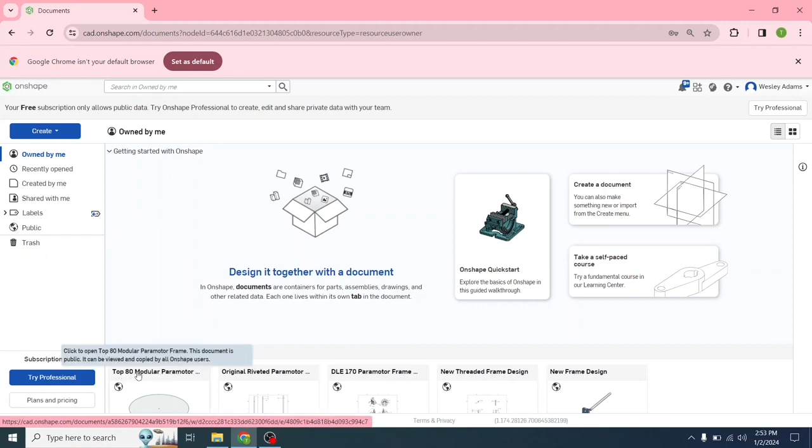Last time we created this file here, top 80 modular paramotor frame. Let's left click on that and open it up. We're going to go through and create some parts.

You'll get a lot of repetition with the same tools. That'll be good because if you're new to Onshape or new to 3D CAD, it'll give you a lot of practice with using the tools and how they function. If I go too fast, just pause the video and then you can get caught up and then restart the video. So I'm going to go over to the navigation cube, far upper right hand corner.

Left click on top view. Come over, left click on sketch. Left click on the top plane right here. You notice it highlighted just under sketch 1. It's listed here, so we've got it selected.

We're going to left click on the center point circle tool. We're going to go to the center of that top plane. Left click, drag that out, and then left click again. Now, if I try to left click without turning this off, there's a couple different ways to turn this tool off. I could just left click on it, or I can hit escape. Because if I select any point inside that plane, it's going to create another circle if I don't deactivate the center point circle.

Now that we've got that created, we're going to go up to the dimension tool, left click on that, left click on the outer part of that circle, drag it away, and we're going to set this at 0.73.

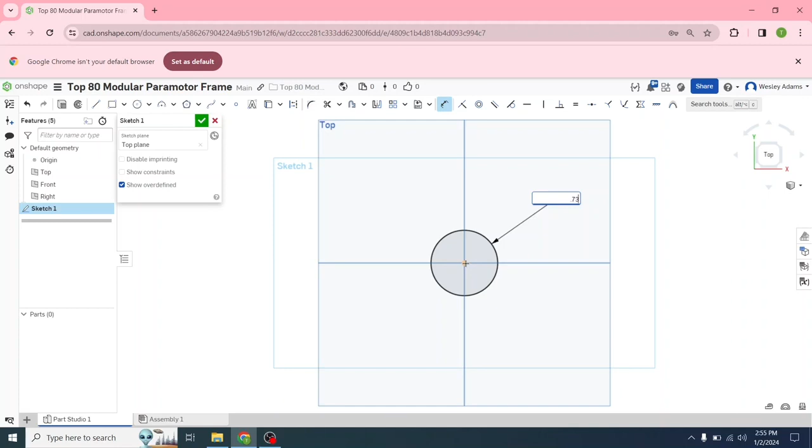Now this is going to be a 3/4 inch tube that we're going to use, but I'm setting it a little bit smaller because what's going to happen is we're going to 3D print this. And that's another reason we're not creating this as a tube. Like I'm not creating a second circle within that circle and making it look like a tube. It'll be too fragile for assembly. So we're just going to make the outer diameter, not the inner diameter, not the wall thickness for this tube. I'm not concerned about shrinkage on this tube, but when we make these modular connections, they're going to shrink and it'd be hard to fit this tube in if we keep the actual diameter of the real part.

So I'm going to hit enter. You notice that is now 0.73. In real world, it would be 0.75. So now we've got to close this sketch out before we do anything else.

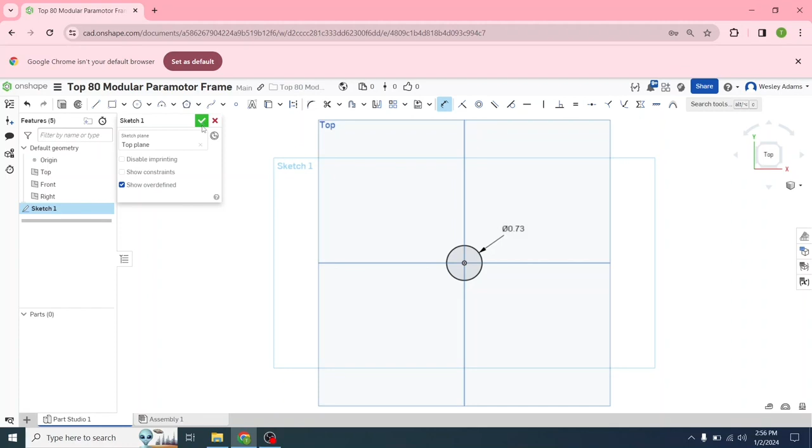So I'm going to left click on that plus sign. I'm going to go over to the navigation cube. I'm going to left click on the front plane. I'm going to go over and create a new sketch. Left click, come over to front plane, left click on that. Go over, select the line tool, left click, go to the center of the front plane, left click on the center of the front plane, drag that up a little bit, left click again.

Now notice how it's trying to create another line. If I left click, it's going to form that line. I don't want that to happen, so I'm going to hit escape, and not only did the line go away, but it deactivated that line tool up.

I'm going to go over to the dimension tool again. I'm going to left click on the line, drag that out, and we're going to go 36 inches. So I'm going to left click on the numbers, 36 inches. If yours is set to a different dimension, like millimeters, centimeters, some other measurement, I'm going to show you how to change that.

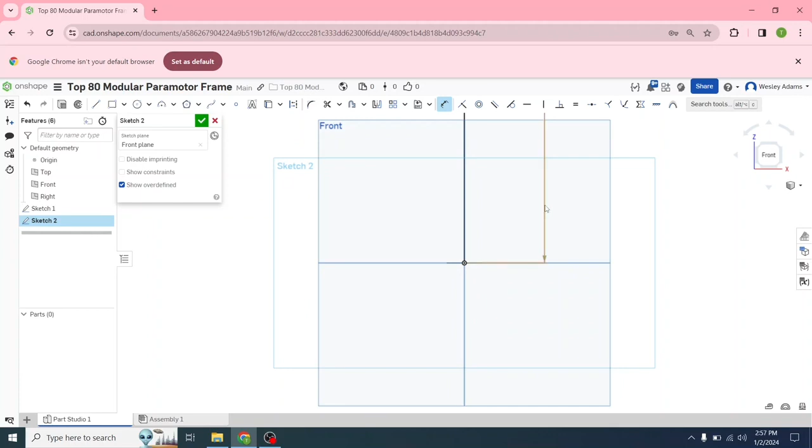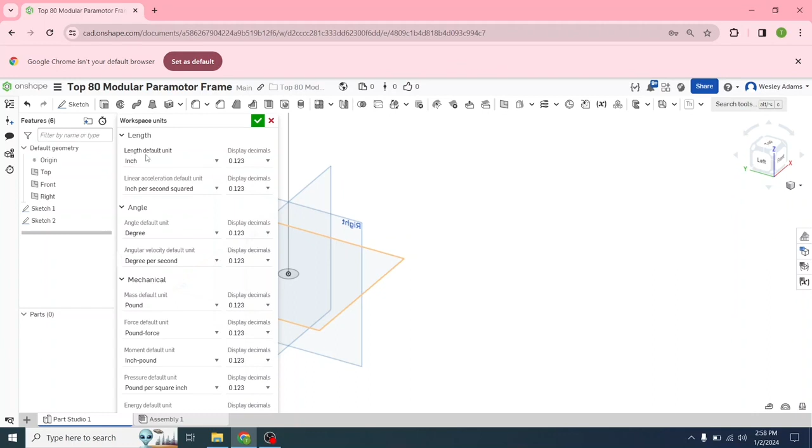I'm going to left click on sketch 2. Now go up to these 3 lines right next to Onshape, and then go to workspace, units. Left click on that and set to inches. That's what we're going to do for our default length. That's what our real world assembly is going to be.

We're going to use one of our tools to form the tube, the outer portion of the tube. Go over to the sweep tool. So it's the third one in the list. Left click on that. Notice it's set at solid new. I'm going to go down and I'm going to left click on that circle.

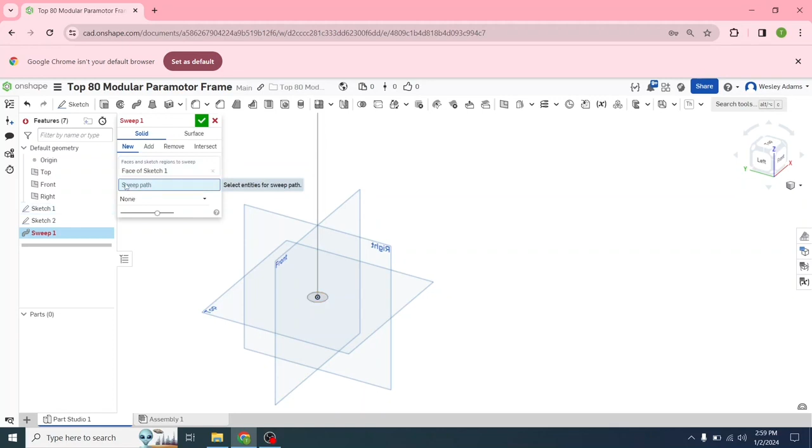Now it's asking, what's the path? So what do we want to sweep? What's it going to follow? Left click on that red line. Left click on this line we created, and now it has formed our tube. Make sure it's solid, new, faces of sketch 1 and edge of sketch 2 for the path.

I'm going to left click on this green check mark and I'm going to scroll out. I'm going to go back to front view real quick.

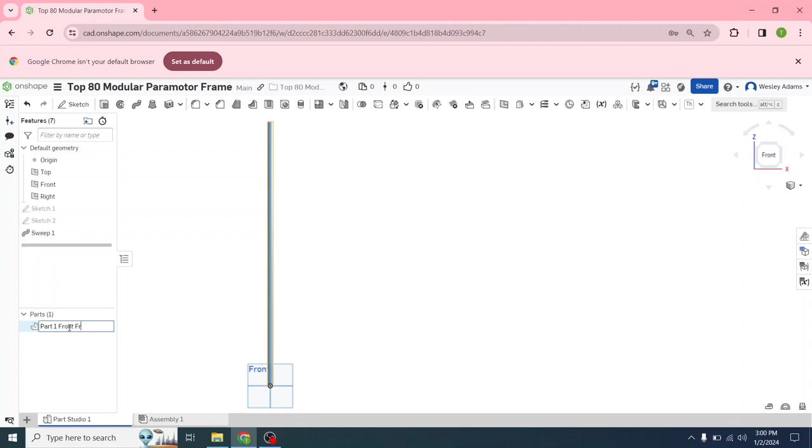I'm going to go down here to part 1 and right click on that and we're going to rename it. So this is going to be our front frame tube. I'm going to hit enter. We're not done with it yet.

Down on the wheel and hold, you can move that part around. We're in right view. I'm going to left click on sketch, left click right view. I'm going to scroll in. You notice we've got right plane selected.

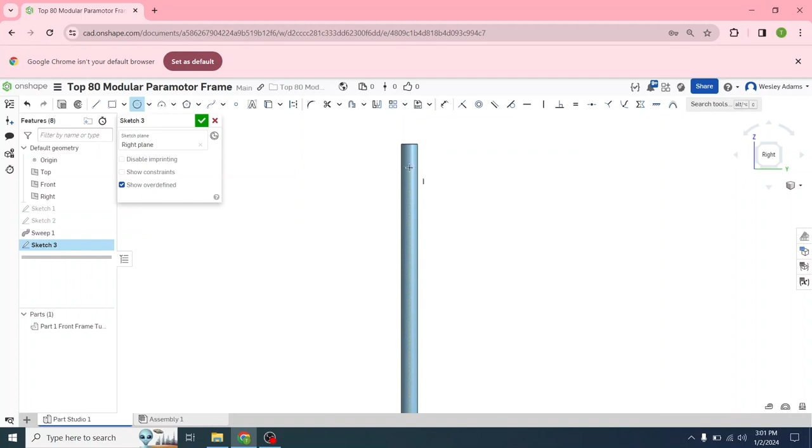I'm going to create a center point circle here. I'm going to left click here. Now you see that dashed line. I'm going to scroll in so you can see it. It's yellow, that yellow dashed line, and then that vertical line that appears in that square. That's telling us that we're centered up in that tube, so we're in the center portion relative to the right plane. And I'm going to left click on that.

So we're going to create a 10 millimeter size hole here. So we need that in inches. So 0.394 is what we're looking for.

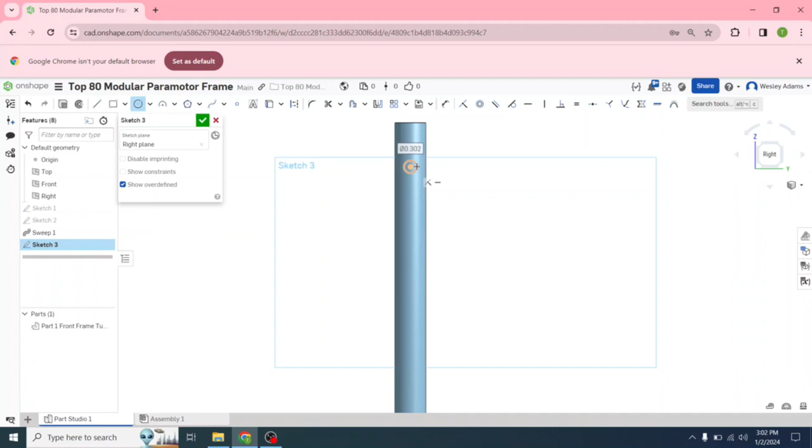We're going to go to the dimension tool and we want that circle we just created, because this is going to be the hole for the swing arms. We want it 3 inches from the top because we're going to have a connection here at the top, and we need it to be in between those two connections.

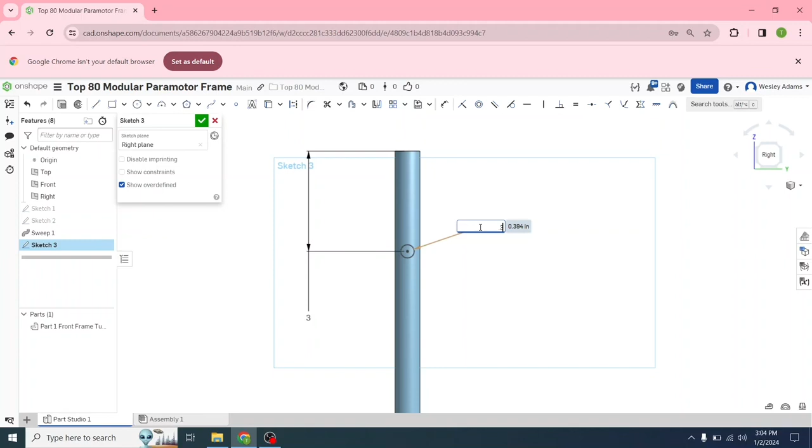So I'm going to left click on that distance I currently have. I'm going to do 3 inches. Double click on that and that should be set at 0.394. Hit enter. And it changes the size of that because we're going to use an M10 bolt, so a 10 millimeter bolt is going to go in that to hold the swing arm on.

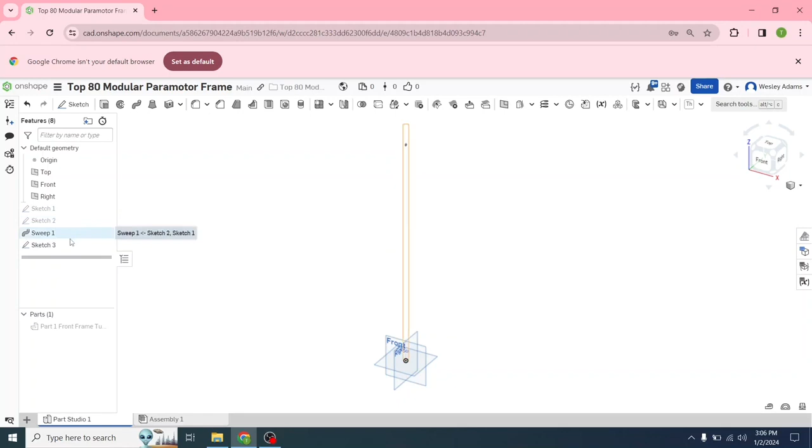So now let's close that out by left clicking the check mark. Now you can, if you need to label these, say what these sketches go to - so you could do sketch 1 front frame tube, sketch 2 front frame tube. The problem is it'll change - the next sketch will be a sketch 1 if you change this. I personally just like to keep these in order because you can come back down and highlight the part, and any sketches near it will be relative to the part you create.

We're going to use another tool. So let's go over, we're in isometric view. We need to extrude that out because we're going to create a hole for that. And left click on the extrude tool. Now it's asking us, what are we going to extrude? We just created that hole or that circle. Left click on sketch 3 and we want it to remove.

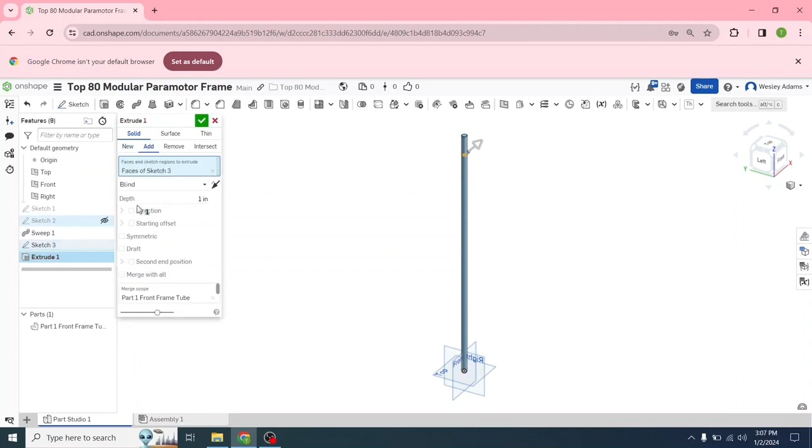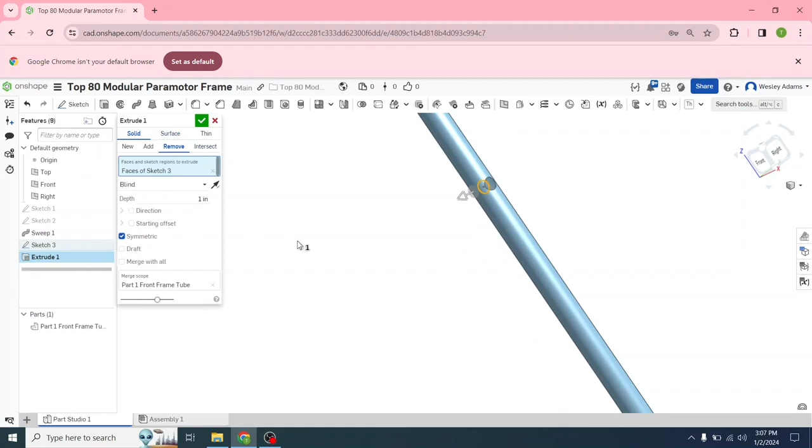So let me scroll in on this so you can kind of see what's going on. Notice it created a hole here, but it didn't do that on the other side because it's not symmetric. We're going to go symmetric. It's set at 1 inch, so we know it's going to go out far enough now on each side to create that hole, and it's removed that area. Now let's left click on that, and now we have that hole centered up.

So now part 1 is created. We're going to go back in and create some additional parts. That's all we needed for part 1. Everything we just did for part 1, we're going to do for part 2, so it'll give you repetition. Click on top view. We're going to create the motor mounts now.

So let's go left click on sketch, left click on top view, left click center point circle, left click in the center of top view, drag that out, left click again and then hit escape to deactivate the center point circle tool. Left click on the dimension tool, left click, drag that out, 0.73 because we're going slightly smaller than the actual part, so when we 3D print it, we won't have any problem sliding these past each other.

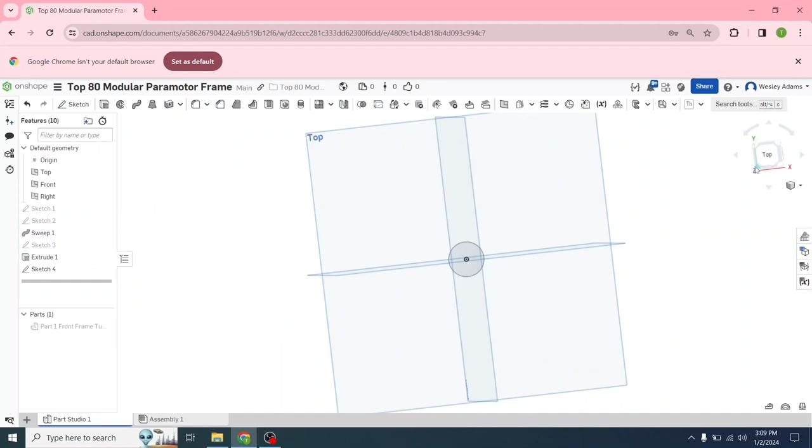So that's on top view. Let's close sketch 4 out. Let's go over, left click on front view, left click on sketch, left click on front view. You notice it says front plane here.

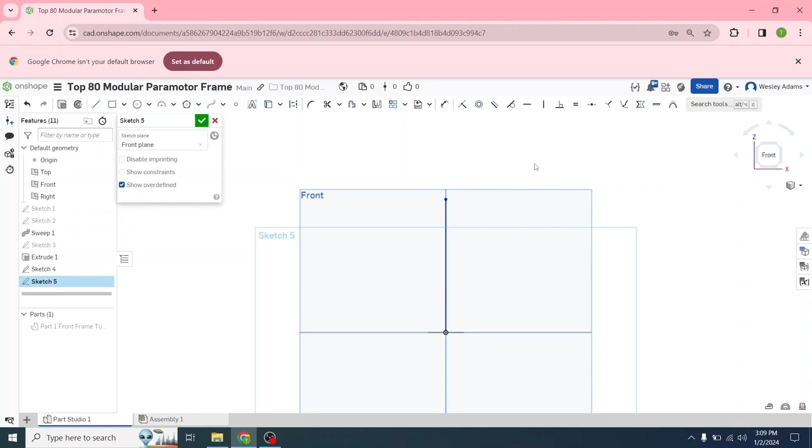Left click on the line tool, go to the center of the front plane, left click on that highlighted region, pull that away, left click again, pull the line away, hit escape so we don't create a second line. Left click on the dimension tool, left click on that line again, 14 inches. So hit enter, now we're at 14 inches. Left click on sketch 5 on that check mark.

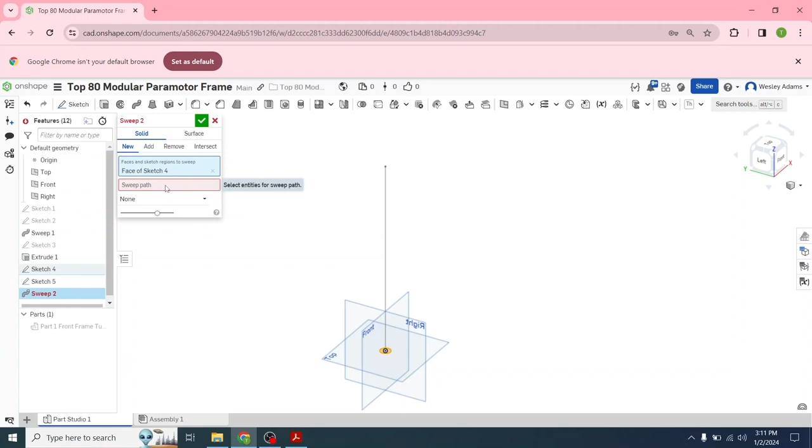Now we're going to create this as a tube just like we did. So I went over to isometric view, clicked on the corner, left click. Let's go over to the sweep tool again, left click on that. It opens up solid new because we're creating a new part. Left click on the circle so that it highlights. Go up here where it says sweep path, left click until it turns blue. Left click on the line and it created our tube for us.

Make sure these are still solid and new. Face of sketch 4 should be in this region. Edge of sketch 5 should be here. Left click on the check mark.

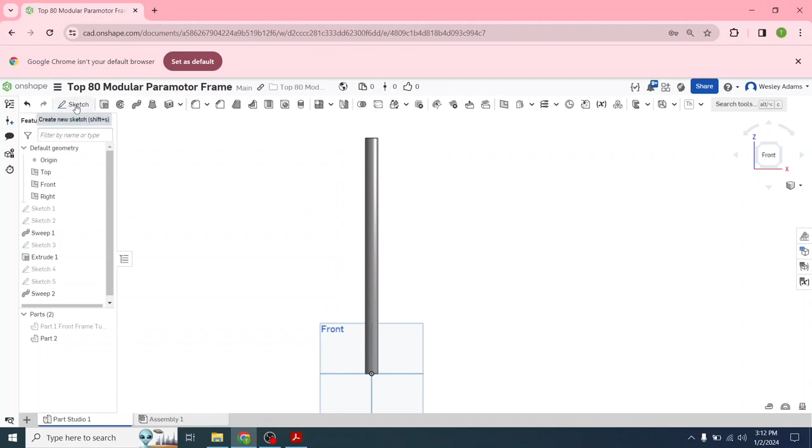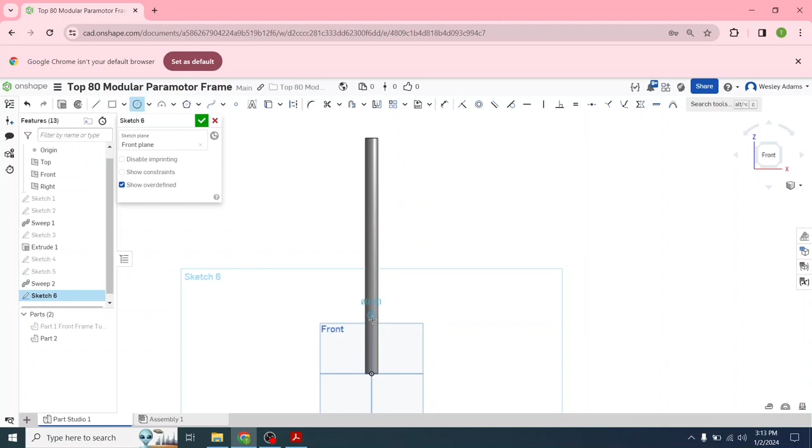Alright, so we are in front view. Let's go to sketch, select, left click on front view. You see it selected here under sketch 6. We're going to create 2 center point circles. We're going to create one. Notice that dashed line telling us we're in the center. We're also getting that vertical line. We're going to drag that out, and we'll get these set.

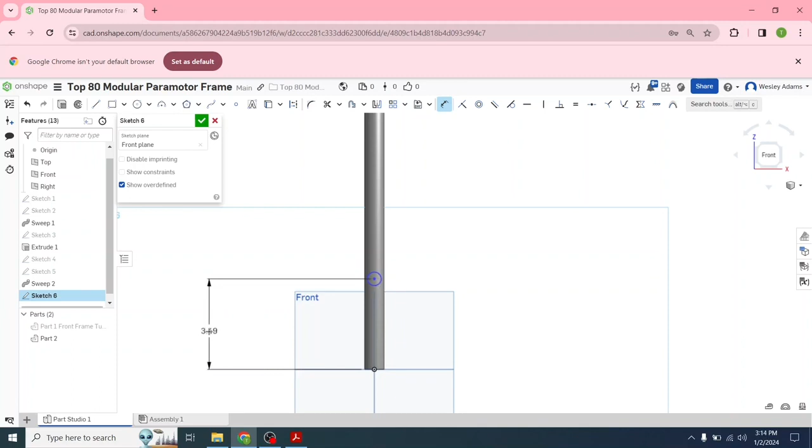Alright, so let's go up, left click on dimension tool, go to the center of that circle. Let me scroll in so you can see. So not the outer part, the center. Left click on that, left click on the edge, bring that away, and that should be 2.75. So we're going to go 2.75 inches from that edge.

We're going to do the same thing for this one. Select the center, select the edge with the dimension tool, pull that away, 2.75, 2.75. There we go, it should be 8.5 inches apart. This is not necessary, but I'm going to do it anyway, just to drag that out. That should be 8.5 inches apart.

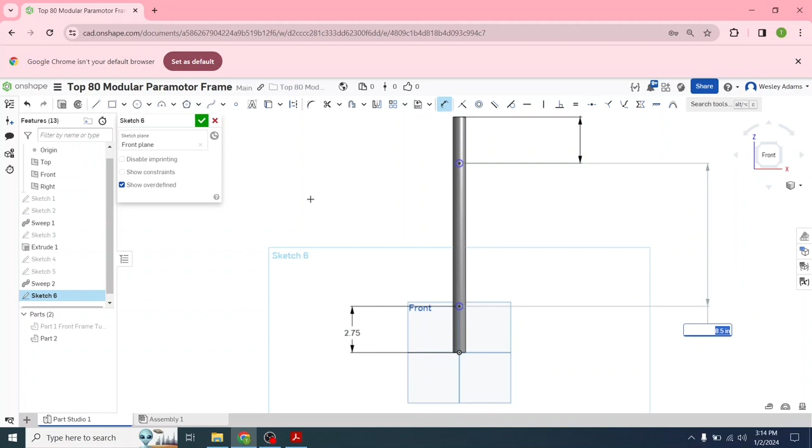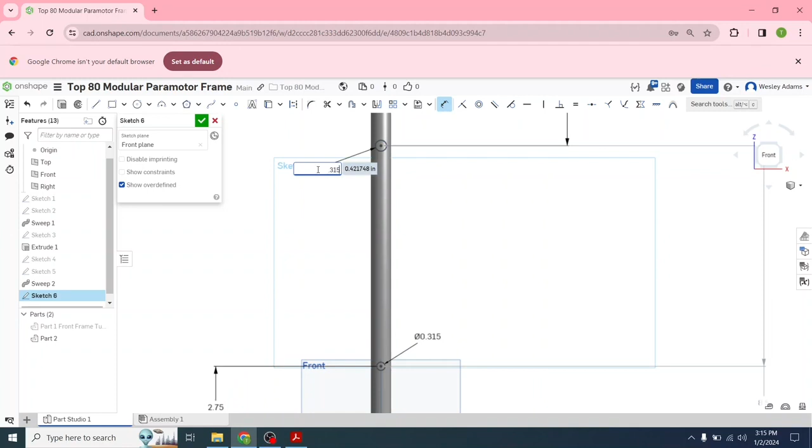And then hit enter. Oh, actually, we've got one more thing to do. So we're still on the dimension tool. This needs to be, so I'm going to left click on that, 0.315, so 8 millimeters. We're doing it in inches since everything is set to inches. That's the size of bolt we're going to use. 0.315. Hit enter. There we go. So now those are the proper diameter.

Now let's close this out. Let's extrude those. So left click on extrude. Go back to the circles we just created, which was sketch 6. I'm going to left click on that. So now those have been selected. Now you notice a cylinder popped out of that.

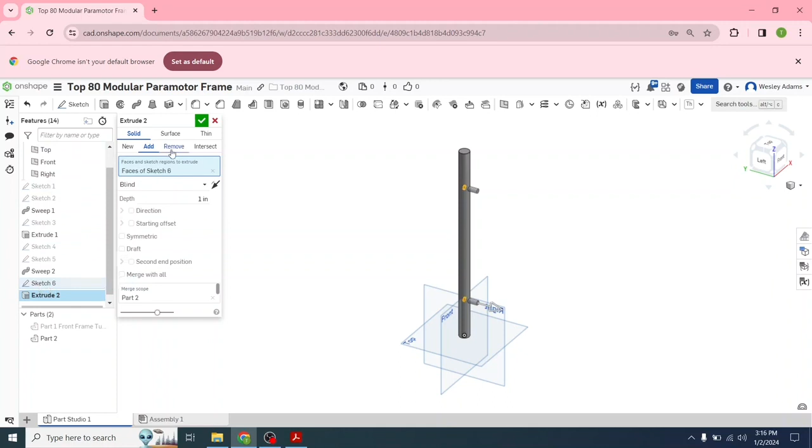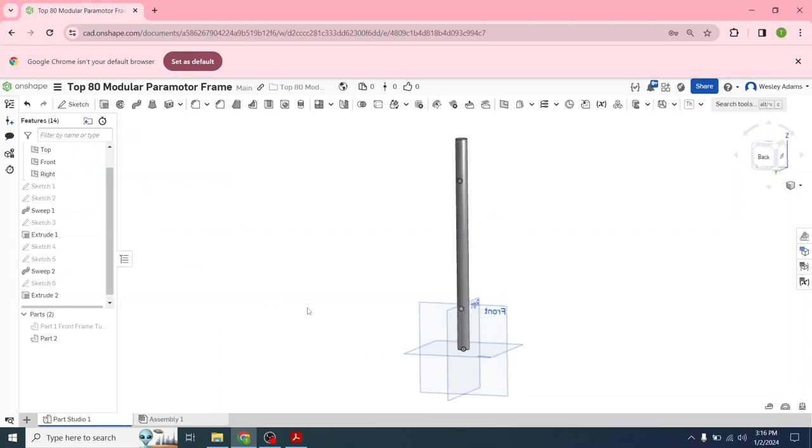We don't want a cylinder. We want to create a hole. So it's adding, we want to remove. So it should be solid, remove, symmetric, and since that depth is set to 1 inch for part 2, it should be coming out both sides. So it should have created a hole on either side. Left click on the check mark and we have extruded that. So now part 2 has been created.

Let's go down here and rename it so we know what it is. Right click, and I would always rename your parts, even if you don't rename the sketches, just to keep everything organized. Motor mounts.

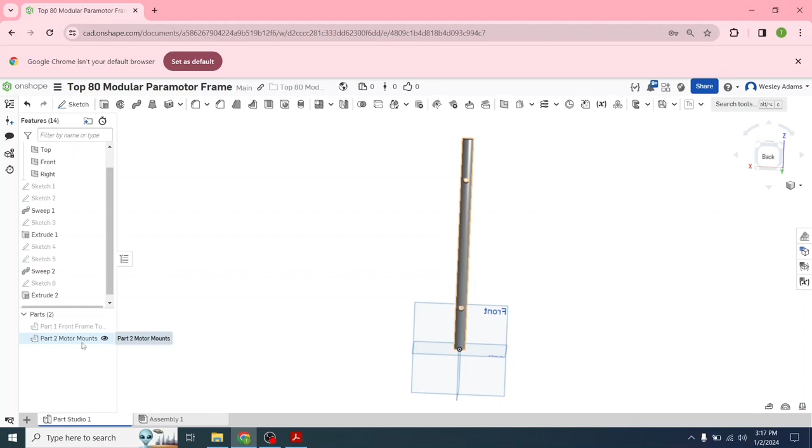All right, let's add something we didn't do for the last one, just so when we get to assembly view, everything is a different color. Let's right click on this, so all I did was right click on part 2. Let's go edit appearance. Let's make that a shade of green. And then left click.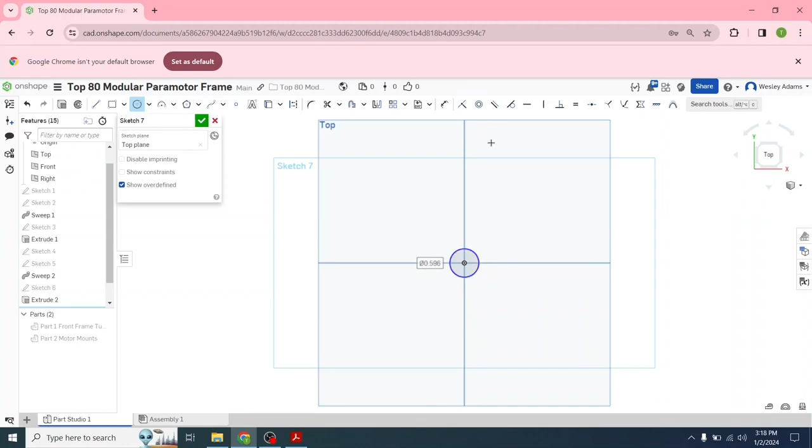Let's close that out, so we've gotten some repetition. This next one should be fairly easy for you. We're going to create the support tubes to top view again. Let's go to sketch, left click on top view, left click center point circle, left click on the center, drag that out. Hit escape to deactivate the center point circle.

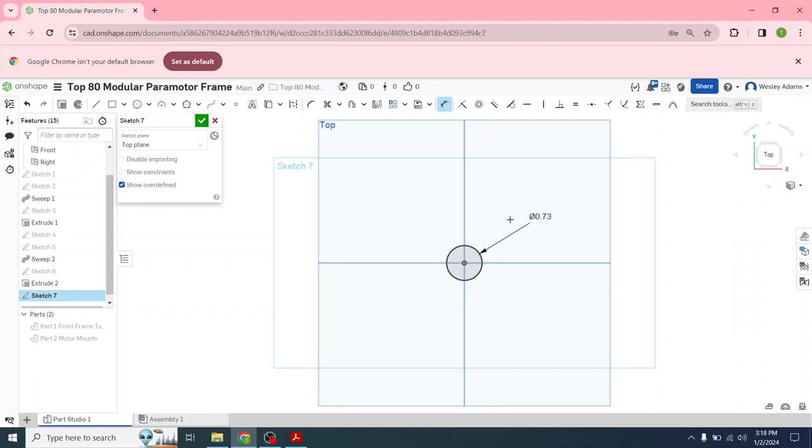Left click on the dimension tool. This one is going to be 0.73. Remember, we're going a little bit smaller scale than the actual real world part, mainly for the 3D prints so that everything fits together. All right, so we've created the circle.

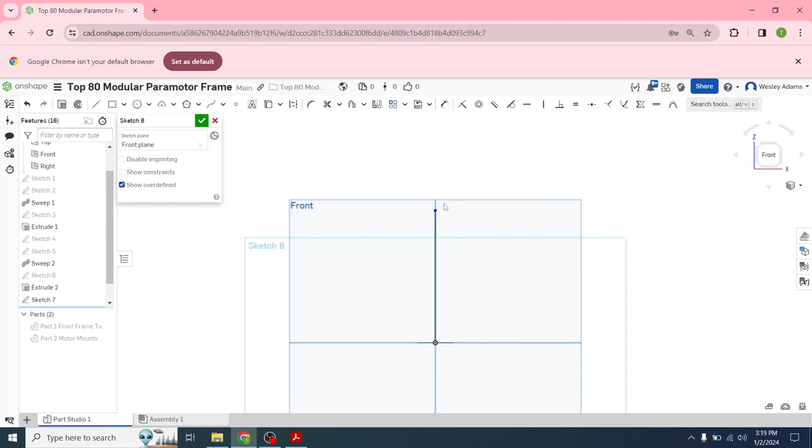Left click on sketch 7. Scroll around to front view using the navigation cube. I'm going to pull that down by holding the wheel down. Left click on sketch, left click on front view, left click on the line tool, go to the center of the front plane. When it highlights, left click, drag that up, left click again, pull that away, hit escape to deactivate that line tool. Left click on the dimension tool, and this one's also going to be 14 inches.

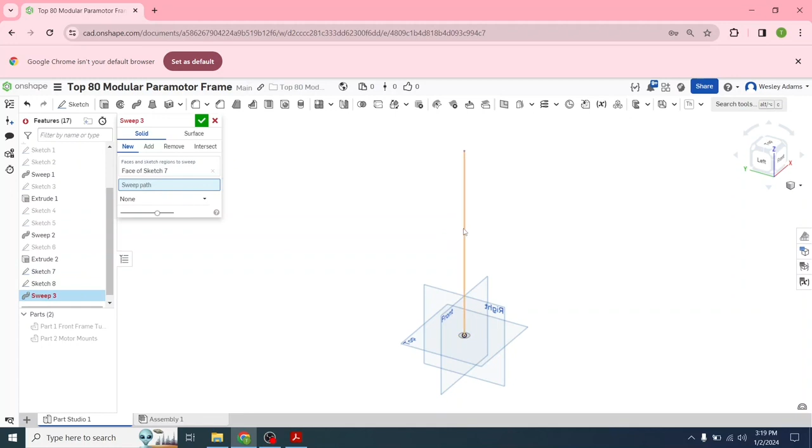Same length as the motor mount. Left click on the check mark. Let's go over, we're going to sweep this. Left click on the sweep, solid new. We want to select the circle for face of sketch 7. Sweep path, left click on that. Go in, left click on the line, and now you've created the support tube.

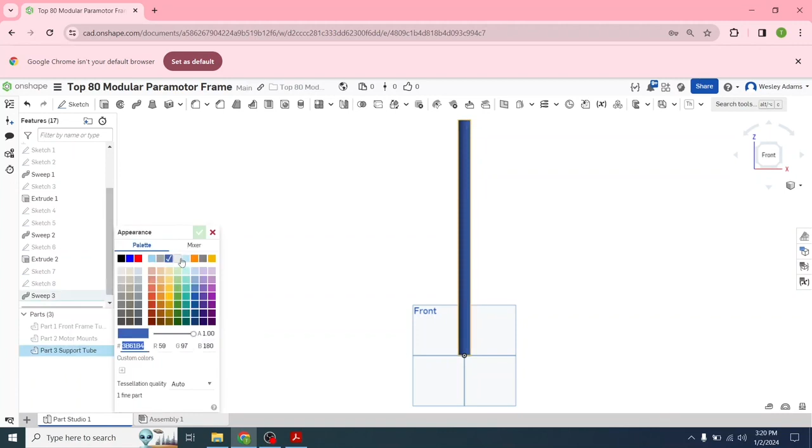Let's right click on part 3, hit rename, and call it our support tube. Right click, hit edit appearance, and let's go a light blue with that one. Let's see if these all look a little different.